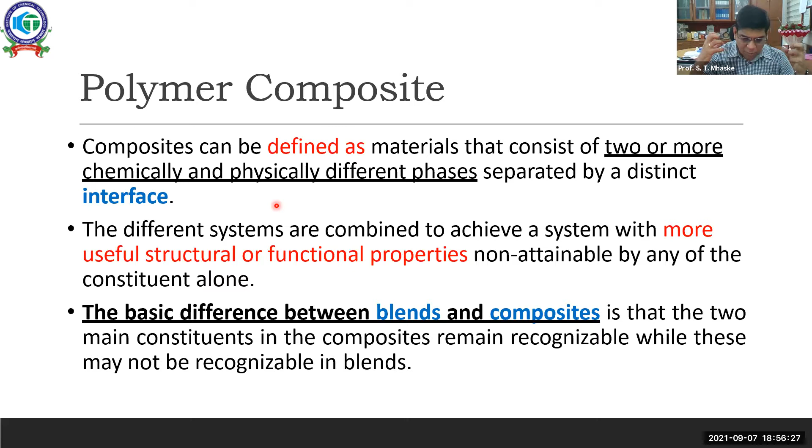Okay, and the two ways by which you can form the composite which we have talked about are physical and chemical. Chemical bonding is a chemical reaction: though it is a non-melting material, you can chemically bond that material with a plastic. The other one is where you are just dispersing one material in a plastic body and it becomes a composite. So physically bonded composites and chemically bonded composites. Chemically bonded composites are stronger.

Okay, and don't worry, I have made it in a more pictorial format today, because certain terminologies which we will be using, if you can connect them to day-to-day examples, you will be more interested to know further. So generally, what examples are there which occur naturally? Composites are not something which are only man-made systems.

Human beings formed composites quite a bit later, but naturally occurring materials are formed as composites. Like wood, which is cellulose plus lignin. Lignin is a chemical class which binds the cellulose together. This kind of material also has a composite structure. Whenever you have a brick structure, that is also a composite wall structure. You do the strengthening by putting two different mixtures together to form a composite. Human muscles and human bones are also composite bodies.

So composite is not something we are knowing for the first time. Nature is producing composites day in, day out, and these things have been in existence for centuries. Only related to plastics or materials, we are making it newly on the basis of our requirement. We customize which material is to be added, how it should be and how much it should be. So that way, there's nothing so great about composites.

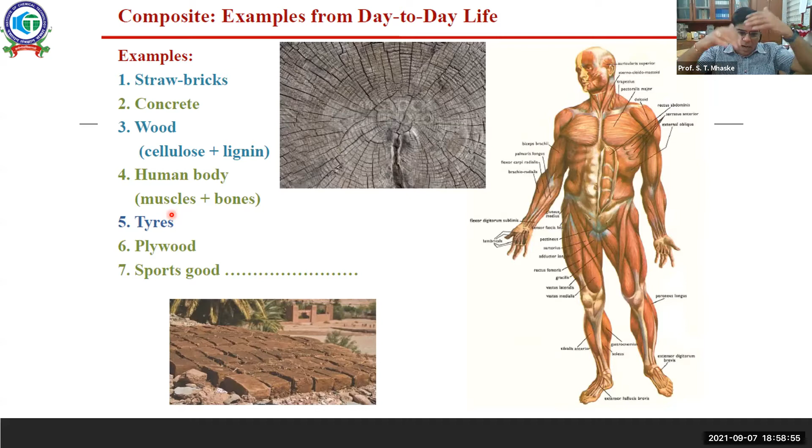And one example noticed here is tires. Tires, as we all know, have a fiber and rubber, or a metal wire and rubber. So that kind of material you can also call a composite part, whether it is a rubber and metal composite or a rubber and fiber composite. That is a commercial example you can relate to what we are discussing about composite parts. Okay.

Now, how can any composite be made? I mean, a few of you may be in a thermoset industry or connected to a thermoset industry. Are people in your class in a thermoset industry or no? Sir, we are using SMC, DMC. Oh, okay, Mr. Nilay. So you are using SMC and DMC.

For which application? Then PF also. PF, urea melamine, these are the materials. Okay, Mr. Nilay, for which application are you using SMC and DMC based material? DMC we are using for electrical contactors, the shell body of that. Okay. So you can relate composites and today's lecture very closely, because you have been doing that part.

Right. So any composite has constituents, two or three, whatever the additions may be, but they will be in classes. One part you take as the reinforcement, and another part you take as the matrix. The matrix is whatever phase is continuous, like you are using a plastic in which you are putting glass fiber or some kind of glass roving. So the matrix becomes your plastic, which is the continuous phase, and the reinforcement becomes your glass fiber.

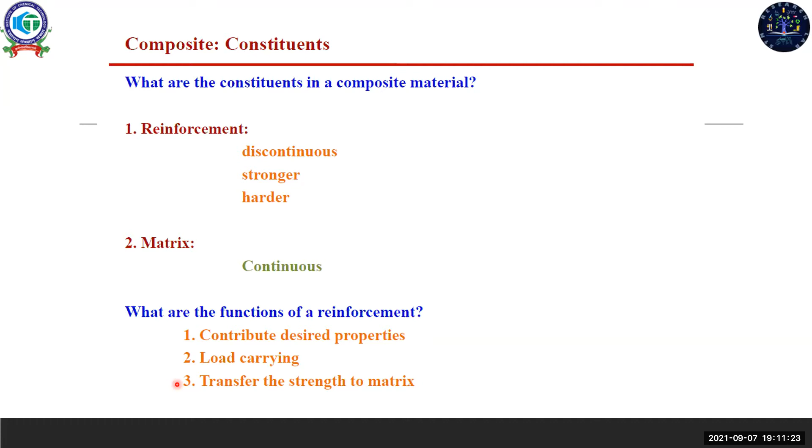Mr. Kishore, if you look at homogeneity, if you have a compatible system in the blend, it is more homogeneous as compared to a composite. In a composite, one of the ingredients, the reinforcement, has its own identity, so it will not mix. So there is not much homogeneity. But the lack of homogeneity is the advantage for load bearing. Because if it is homogeneous, one simple example I can give you is a plastic film. You have a plastic film to which you apply a certain force. So at an angle, it tears or comes apart. Once you apply a force, it starts tearing, it starts coming apart.

But if you have a mesh next to that plastic and then you tear it, tearing is not easy because the mesh is a network structure. It is not allowing that force to percolate easily. The force percolates onto the mesh from one strand to another, so the distribution of the force has a wider angle. Due to which you require a larger amount of stress to tear it.

For example, yesterday we were talking about a product, I think by Pallavi ma'am, related to raffia. Yeah. So in raffia or some lamination, you make it a weave or warp pattern and then you laminate it. In lamination, with the reinforcement action, the stress bearing or load bearing capacity of the whole gunny bag will also increase.

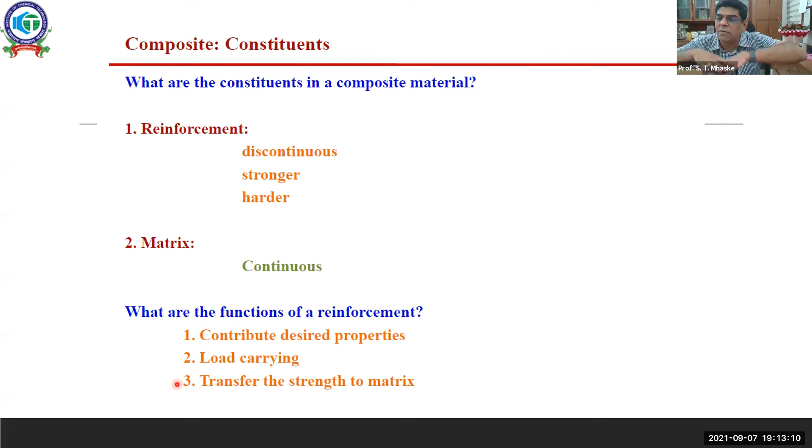One reason is you do the lamination or a liner so fine material doesn't leak outside. That is definitely a mandatory requirement. And one more advantage is that the strength of the total material, the total product, will also increase. So though it is not homogeneous, the non-homogeneity is what makes the material more tolerant against the load. Am I clear, Mr. Kishore, on this? Yes, I understood. Thank you.

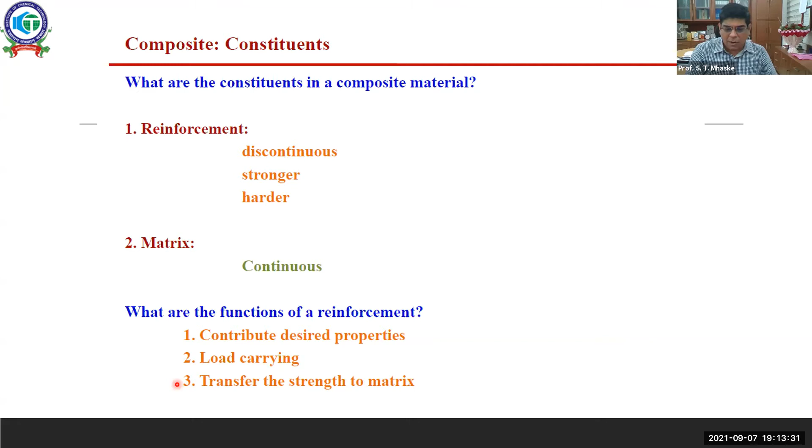So if you understood why composites and what the constituents of a composite are, then we'll go to the constituents and their functions. We have seen the function of the reinforcement which you added. Now we'll see the function of the matrix. The function of the matrix is to hold the fibers together, like when you put glass fiber into some resin or plastic. The matrix or plastic binds the fibers together; the fibers get coated with the plastic and it binds them. So that is holding the reinforcement. The fiber is one part, but holding the reinforcement is one function the matrix is supposed to do.

Second is to protect the fiber from the environment. If it is a fiber or any reinforcement which is just dispersed, and you have not coated it with any resin or any impregnation, first you cannot hold them tightly, and it will be directly exposed to the open atmosphere. Reinforcement you get from a harder material, so in that case you will get more wear and tear. So to avoid that environmental impact, the matrix, the plastic or resin, is utilized.

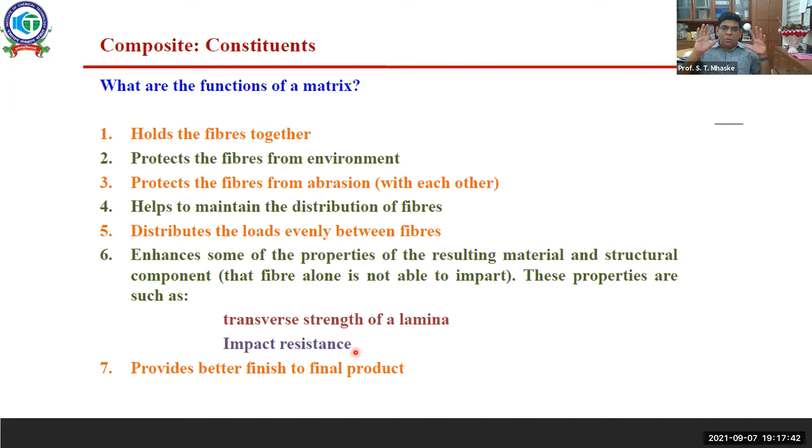So function wise, there is a reinforcement and a matrix, and the individual constituents have individual functions. The reinforcement increases the load bearing capacity, whereas the matrix holds the reinforcement and gives resistance to environmental impacts, and the transverse direction or machine direction will not only have strength; it has multi-directional strength. So these are the functions performed by the constituents, the reinforcement and the matrix.

Now, which reinforcements can be used in the plastic industry? Reinforcements in the civil industry are metal mesh, metal gauge, and many others. The textile industry uses cellulose and fibers. All other industries have their own. Overall in the plastic industry, which fibers can we use for reinforcement? Mineral-based fibers are widely used, like glass wool, glass fiber, mineral wool, asbestos, basalt. These mineral-based fibers are more significantly used in the plastic industry.

Whereas considering today's world, which is more serious about environmental impact and the eco-friendly nature of a product, it has certain drawbacks. If the matrix of a composite is biodegradable, but you put in glass fiber or some other reinforcement which is non-biodegradable, ultimately your product is not completely biodegradable. So there are other classes of fibers available on a commercial basis to be used in certain applications in thermoplastics and thermosets, and certain are from animal fibers, but the requirement of the polymer industry is quite high.

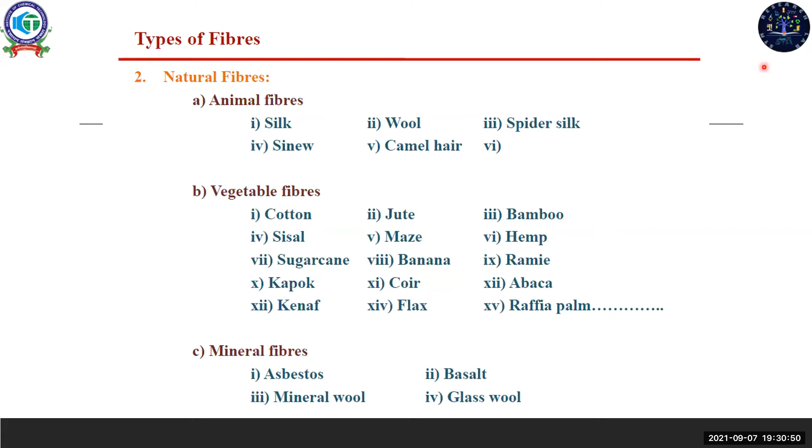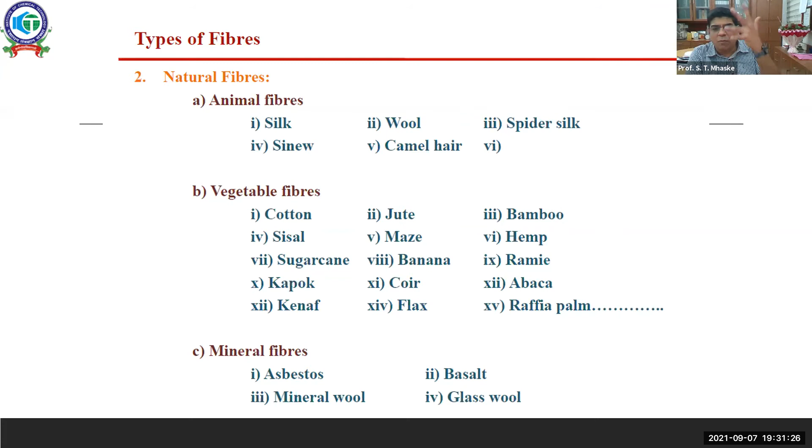So if you do all this treatment to make it more similar to mineral fibers, the cost becomes higher. I do agree. Also sir, presently some persons are using paddy husk and particulate fibers, which we will discuss anyway. That husk is different than these fibers. Though it is also naturally occurring, people are using rice husk and many different husks, but these are particulate reinforcements.

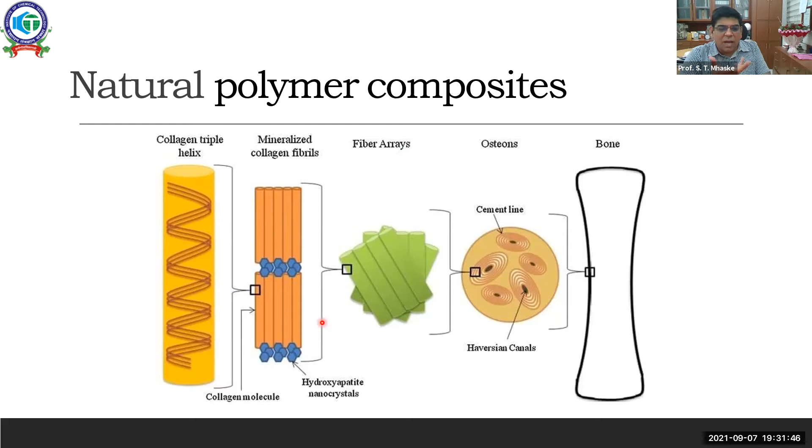We will come to that once we finish with the fibers. But yes, certain husk-based material in powdered format is being used. So natural polymer composite is, as I have said, a niche material for niche applications because it has great biodegradability and more biocompatibility, and that way it is being used in pharma applications because the biocompatibility is good.

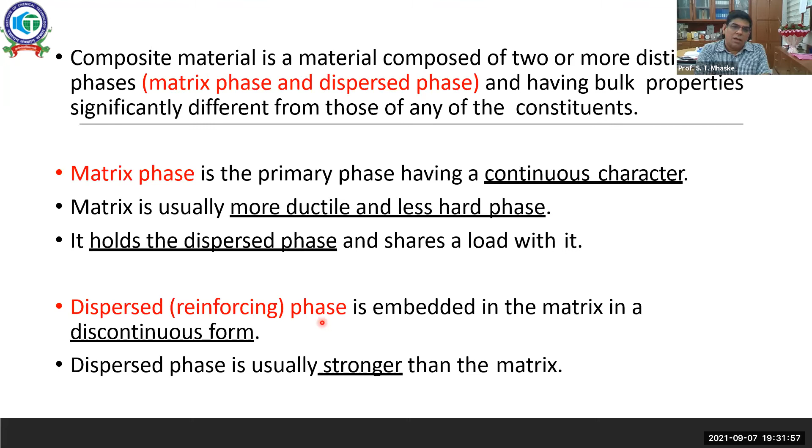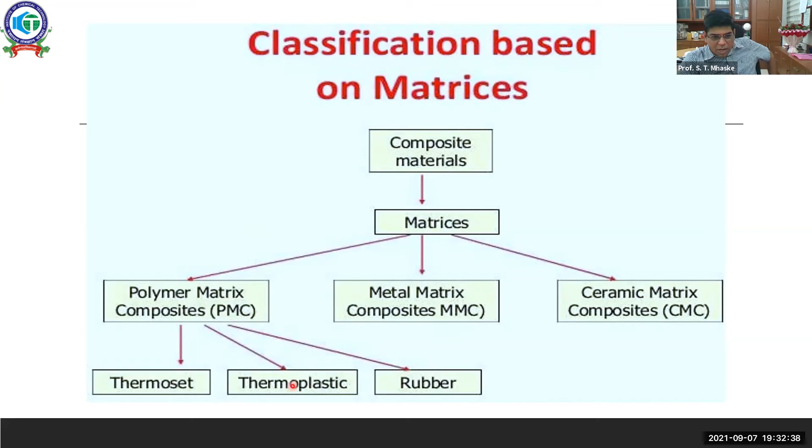Whereas the dispersed phase which we have talked about, certain composite matrix which we are going to discuss now is on the basis of a matrix, like a polymer matrix composite. When you add polymer to a resin, it becomes PMC. So what we deal with in the polymer industry is nothing but PMCs, polymer matrix composites. We are not making MMC, metal matrix composite, or ceramic matrix composite. So polymer matrix composite, which we call polymer composite, can utilize thermoset, thermoplastics and rubber, as we have talked about.

Then in composite reinforcement, what you just opened the subject on, related to husk and all - you have particle based reinforcement, like husk, like filler, like graphite powder, basalt based material. Many mineral based products in particle format, a single particle format, are also called composite format. Wherever you are using fiber, you call it fiber reinforced, particle reinforced, and structural part.

The structural part is like making one film, then sticking it to another film, or sticking one plate to another plate and making it a laminated portion, or making it a composite. So that is called structural composite. So composite may be a particle type composite, fiber type composite, or a structural based composite.

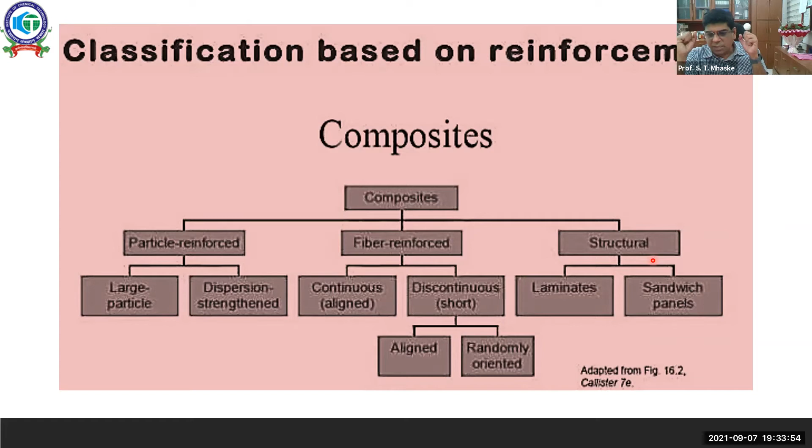So we have seen how fiber based composites work. Now particle based composites - this is like using polyethylene or any plastic, PP or PE or HDPE or PET. There you add certain filler or reinforcing material and disperse it uniformly throughout, and that becomes your particle composite.

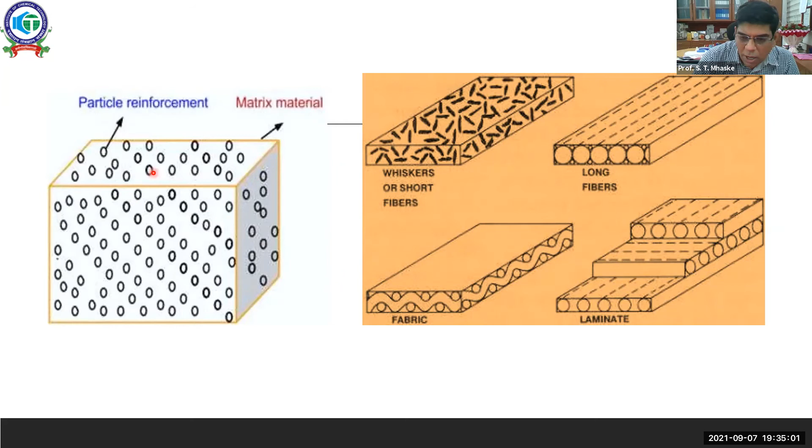The advantage of all three types - whether particle based, fiber based, or structural based - is that you are bound to get strength increase, stiffness increase, fracture resistance like cracking, abrasion, impact, and most important is the corrosion resistance.

Like metals, MMC or concrete matrix composite, which is a cementitious based system, though it enhances the properties of a product, it has one tendency - corrosion. Whereas in plastics, the PMCs, polymer matrix composites, there is no corrosion that occurs to that material. It's a corrosion resistant material.

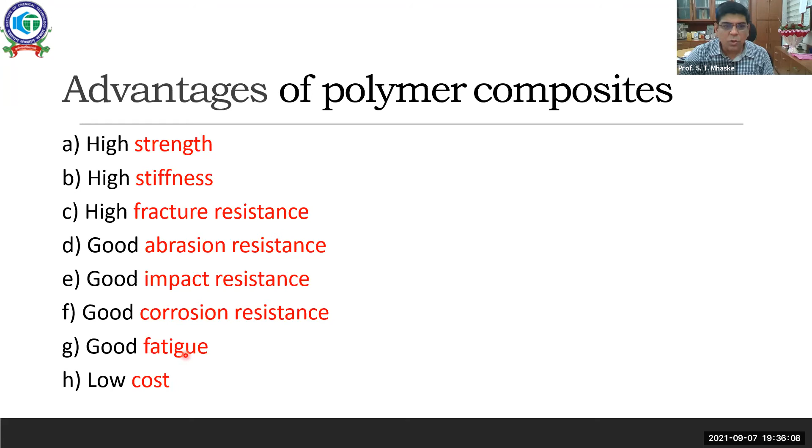Cost wise, if you see particulate composites as compared to MMC and concrete, they are quite low cost. So these are the advantages. Only a basic disadvantage any polymer composite gives is low thermal resistance.

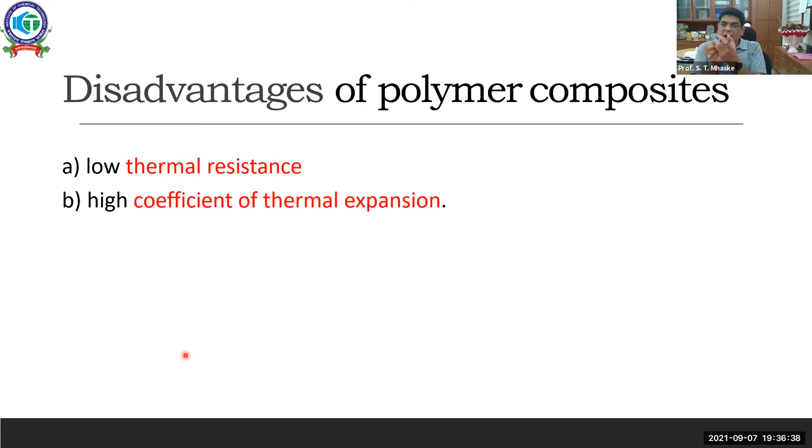Coefficient of expansion - whenever you apply a certain service temperature to that material, it will withstand a certain temperature and after that it immediately becomes degraded. It doesn't melt, instead it starts charring. So that stability we discussed is related to a disadvantage.

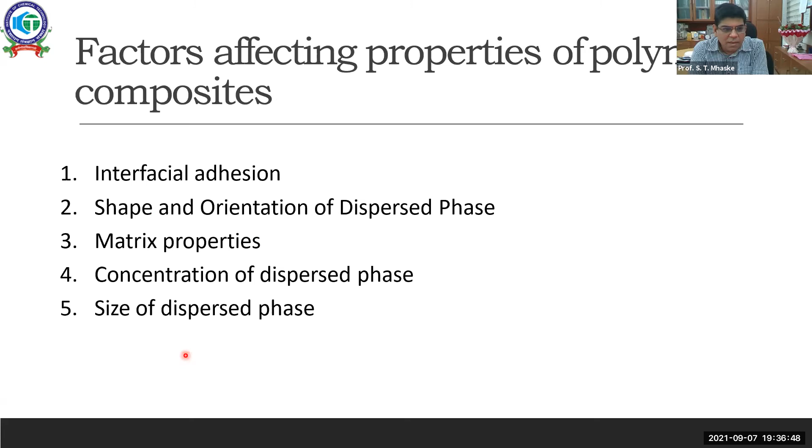Then in this matrix composite, interfacial adhesion - we have talked about this already.

Now in terms of reinforcement in particle format, that is also a great area to be discussed. Though we call each particle as being of the same nature, practically it is not. Certain particles have a spherical shape, certain a cubic shape, certain a platelet shape, certain an irregular geometry, certain a needle shape, certain a star shape. Though it looks like just a particle, the particle shape and particle size are very important to consider while making a composite.

I'll throw you one example, then logically you can think and tell me. We are making a particle-based composite, a thermoplastic particle-based composite. Consider we are adding a certain mineral-based reinforcement, a filler type material. One material has a spherical shape and another material has a plate shape. Which one will give you better improvement in mechanical properties?

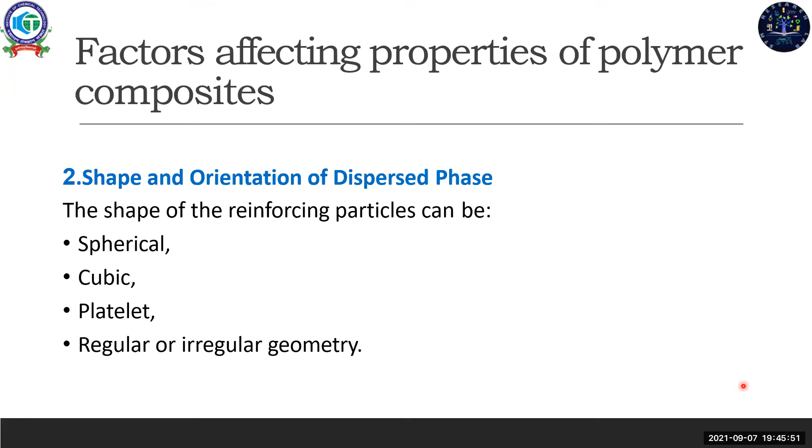Okay, good, thank you. Spherical ones can be used for making soft materials or so. Yes, the spherical one can be used for softer materials, or where there isn't a very high requirement for load bearing capacity, there you can even select the spherical one. Mr. Kishore, that is one option you can keep, but given the choice between these two, you're supposed to go with the platelet one.

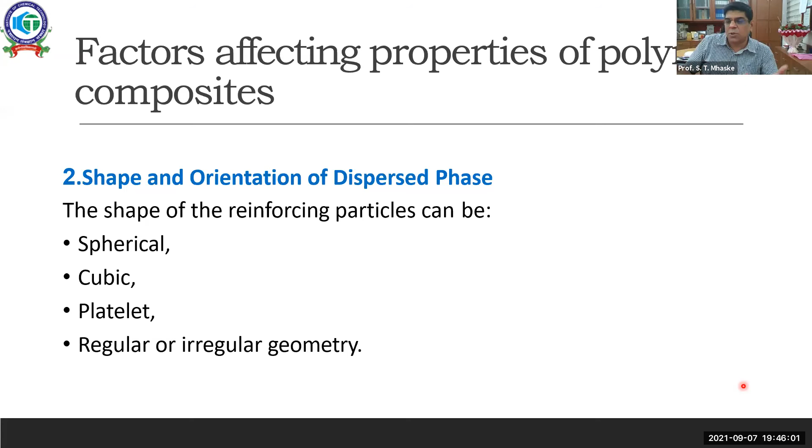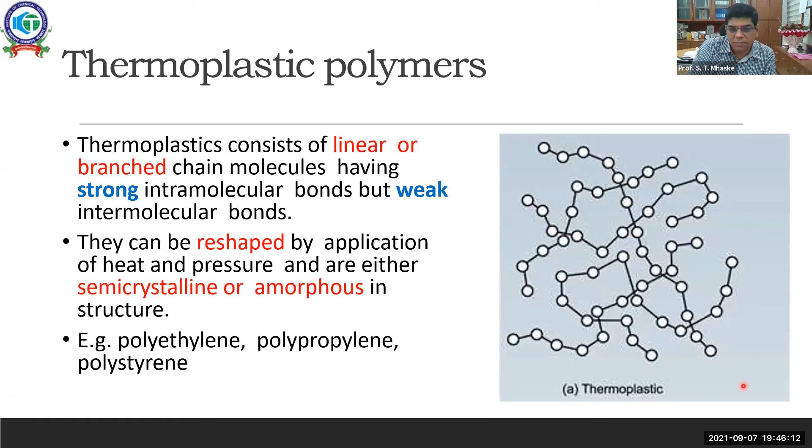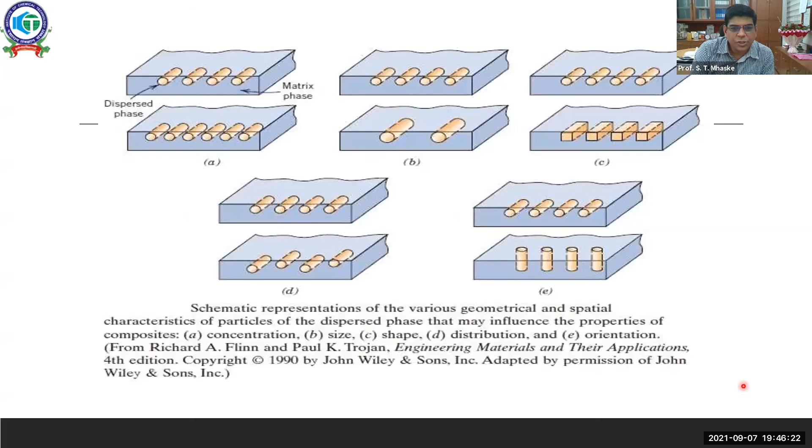So we need to discuss here related to the size of a material. One mandatory requirement, whenever you select any material or procure any material for reinforcement action, is that the average particle size should have a very narrow window. Maximum numbers of particles available in that filler or reinforcement should be of the same size. It should not be that one is smaller and another is bigger. Whatever shape you have selected, there will be a disturbance in the dispersion mechanism.

So always select a size which is very uniform throughout, and due to uniform size, if your processing is good, you could disperse that material uniformly throughout the product. So not only think in terms of the shape, but while buying or selecting a material for reinforcement for your production purposes, you need to check the average particle size of that material.

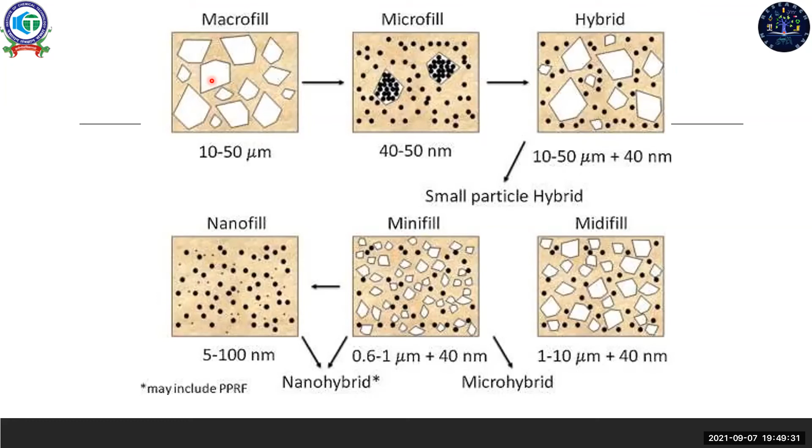It is for processability and uniform stress distribution. Yes, Mr. Kishore, it has more influence on processability. You are perfectly right. And the second one is stress distribution. Your stress distribution and mechanical properties will be uniform throughout the product. And I do agree the processability will not have any issue.

Now, since we are talking about reinforcement and matrix, there is one name that comes here, which is called nano. So, do you wish to know something on nanomaterials, or can we go ahead with just average particle size? No, sir. Please explain nano. Yes, sir.

People are ready to discuss nanomaterials, because nanomaterials or nanotechnology is something everybody must have heard about. We have nanotechnology-driven products, we have nanomaterials, a particular company working in nanotechnology. That kind of terminology you must have heard many times, right? So what is your say? Maybe at a very basic level, whatever you have heard, what do you say about nano?

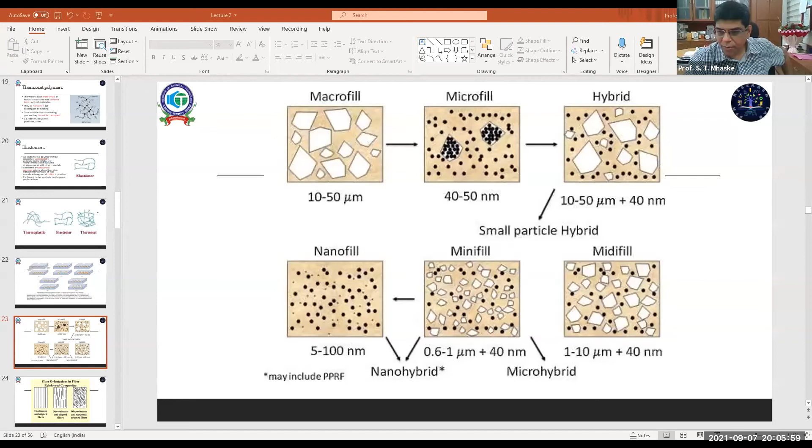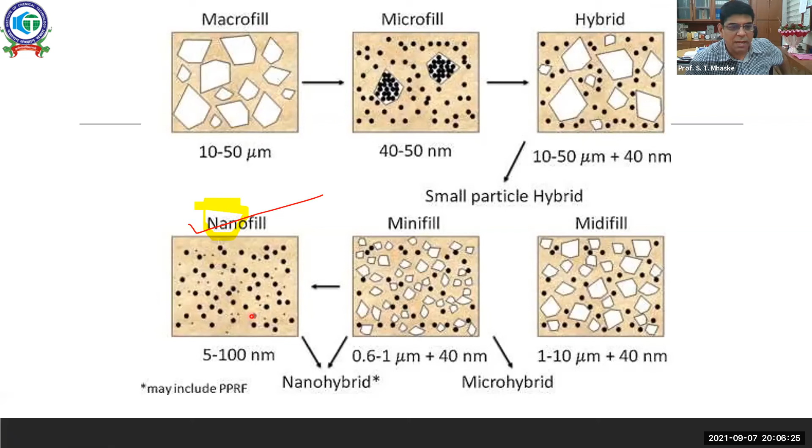So from this, we have come to the nano part. When we discuss nano, only one of the dimensions needs to be in nano, not all three dimensions. So that way it is a nano-based material, and that's why I thought to give you an introductory part to nano.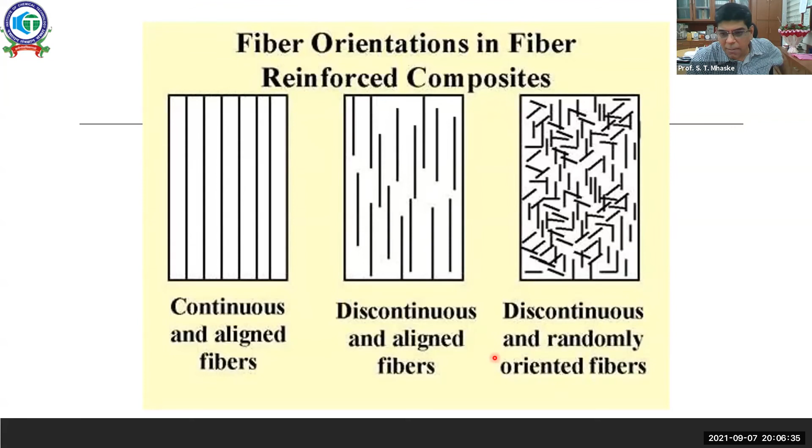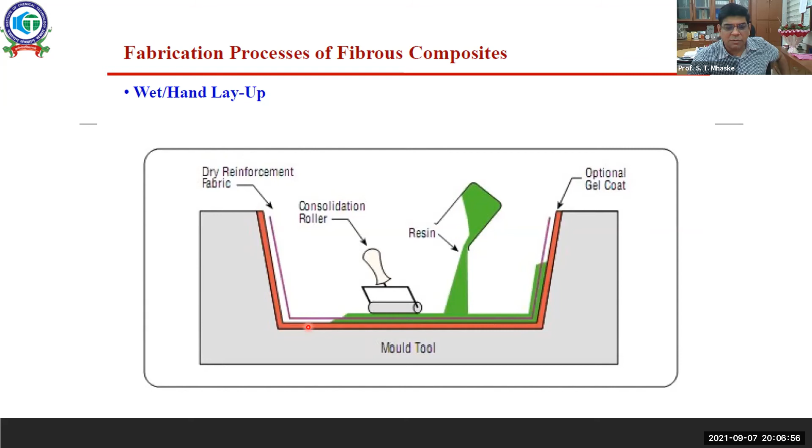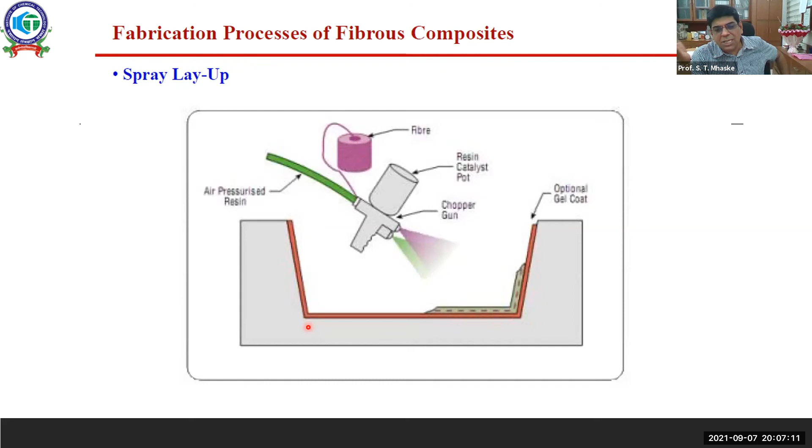Then fibers may be a continuous type, discontinuous type, and a randomly oriented type, as we have seen. There are certain processing techniques by which you can make a composite. This is hand layup, which has been a requirement for the thermoset industry, where people are using it for epoxy, polyesters, phenol formaldehydes, melamine formaldehydes. Individual processing techniques you have in your paper number 2. That's why I'm not giving you the details of the process here, but just giving you some idea how these composites can be manufactured. Then spray is also another application.

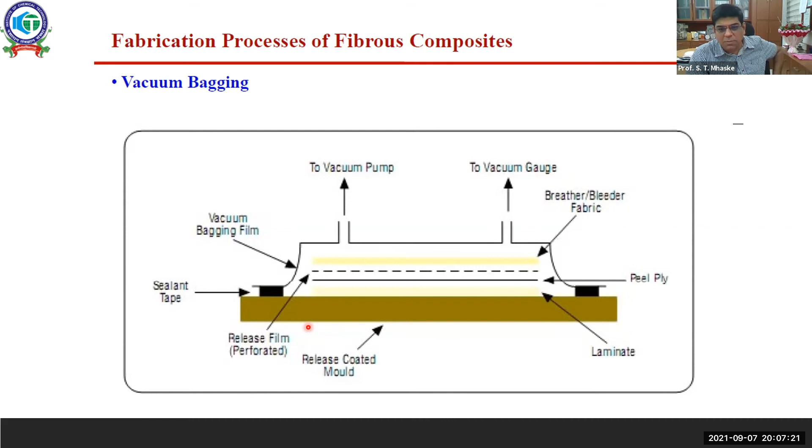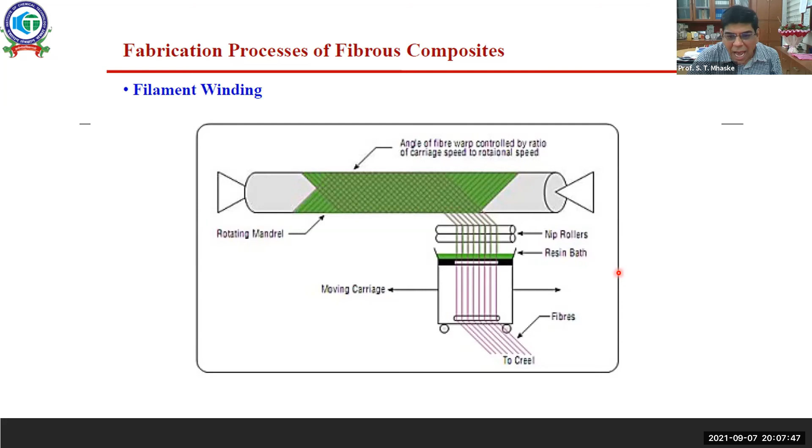Vacuum bagging is also one of the processes by which you can form the composite or FRPs. Filament winding is another class. You have the core on which you wind the filament, and this core is also a plastic body, and you take it as the reinforcement onto it. And if you impregnate it with the plastic or a resin, it gives you extraordinarily high strength. Then pultrusion is another case, resin transfer molding, and certain applications too. Here you can visualize better applications for composite material.

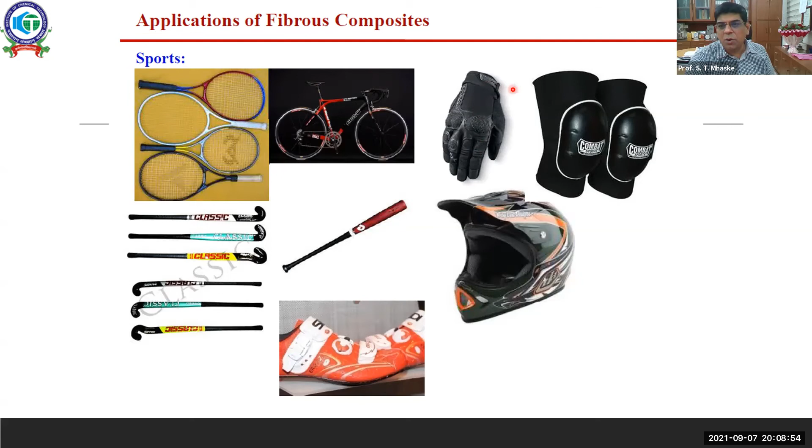These products are all made out of PMCs, which are plastic mineral composites, or sometimes we use certain graphite or carbon fibers, very high reinforcement activity fibers, incorporated into a frame to form a composite. So this is composite material which has fiber with plastics: hockey sticks, bicycle rims or frames are made out of it. Then many reinforcements in industrial textile materials, where nylons, polyesters, aramid, carbon fibers go in, and these are all related to your plastics composites.

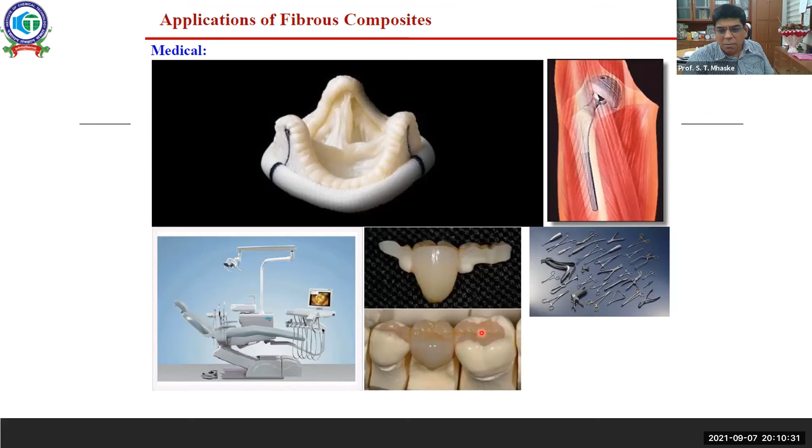And more or less bismuth oxide and trioxides are used in the formulation of this material, which in the open market we generally call tooth cement or dental cement, which you just mix with water, fill in the tooth, and it gets set. But this is nothing but a composite.

So far we have discussed composites, and we have completed the composite part. Do you have any difficulty in the composite part? Please do ask me. Then, if you wish to move on, we can go with polymer flow behaviors. It's 8:10, 8:20, I don't know. Could you digest more on polymer flow, or should we take it in tomorrow's class? Should I continue with polymer flow behaviors, or stop here and take it tomorrow? Because only if you understand that part can we move forward. Just covering the syllabus will not do.

Better, sir, we study flow behavior tomorrow, sir. No problem. Okay. Mr. Mithu Prasad, my aim is to make it interesting and understandable for you. I'm trying to do so. I don't know if everybody is feeling that way, but that is my aim, not putting everything in one day just to fill 10-15 more minutes. Yes, sir, take it tomorrow. Yeah, Sonic, we will do it tomorrow. No worries. Actually, sir, I joined pretty late, at around 7:30. I was in the office.